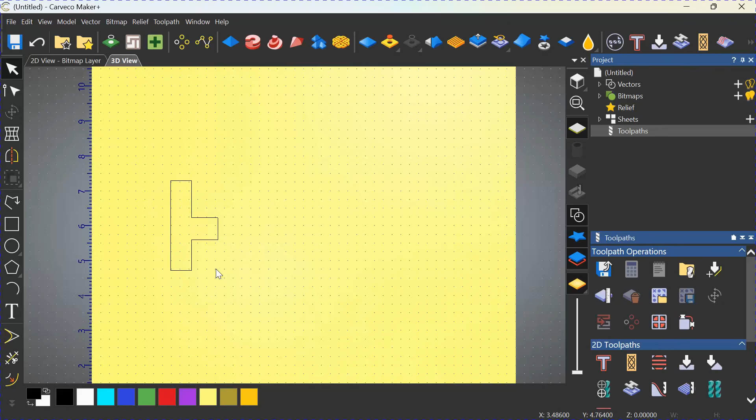Let's go into Carveco. We'll take a minute or two and I'll show you how to do this in Carveco quick. So to begin, we're going to start with the female. This is the female that we have. Now, to generate the male, you have to mirror it. You have to reverse it. So select the female, go over to the mirror tool, select that. Let's slide this back a little bit so that you can see what's happening.

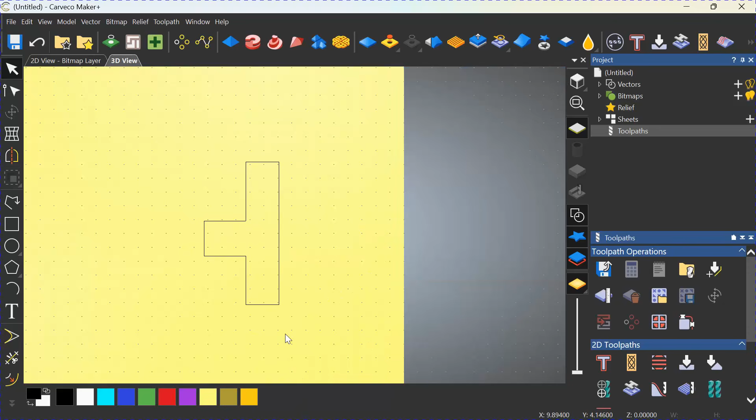We're going to go over here to across model and we're going to select that. Now, as you can see, we have an exact opposite of the female. That's the easy part. So let's zoom into this male here. Now that we have it mirrored, we have our male. Now we need to do the offset. Let's close out the mirror tool. We're going to select the male. We're going to come over here to the offset tool down here on the bottom.

All right, and we're going to offset. My sweet spot is 0.02 roughly. Again, you may want to go larger or smaller with this offset. I would do a bunch of tests before I went to my main piece. I might do 0.01, 0.02, 0.03, 0.015, 0.025 until you get the fit that you're looking for. In any case, I'm going to choose 0.02.

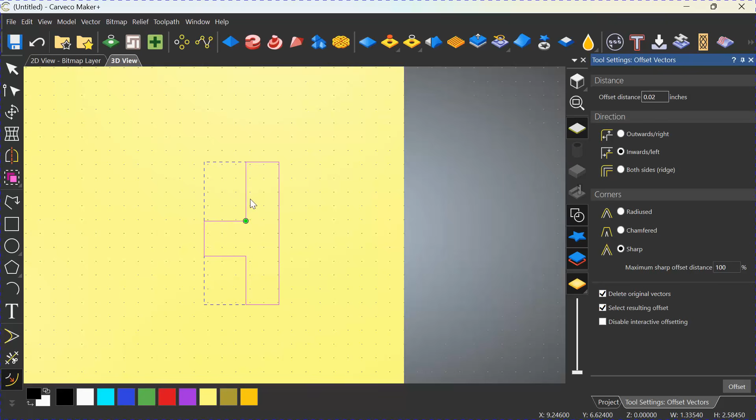We're going to inward offset left, sharp corners, and I like to delete the original vectors when I do this because it takes away the confusion. So deleting the original vectors. I'm going to zoom way in because this is such a small offset, you won't see it. So I'll click offset. Now if you pay attention to that dot right there and that line, you'll see that that distance decreases. There. So we've just offset this thing inward 0.02.

One more thing to point out. The step down on the V bit is 0.125, and I do that to keep the stress low on the bit, and it gives a cleaner cutout.

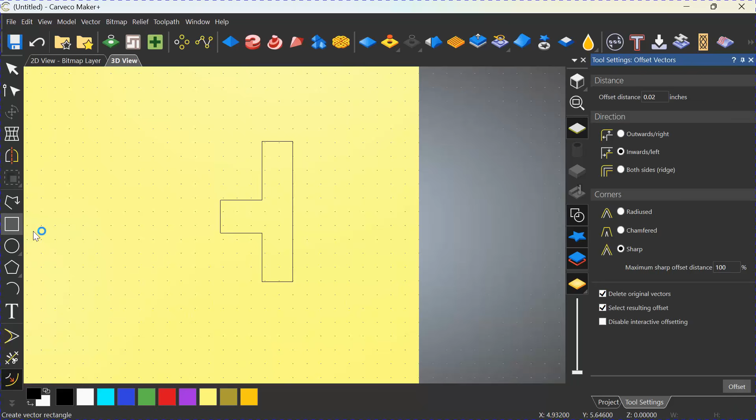So if we're going to make a toolpath for this quickly, just so you can see how we do this to generate the male as a Vee Carve, you need to put a frame around it. It doesn't matter what the shape of the frame is, but a square makes the most sense on this thing. Create the square. I like to click off of everything and then go back to it. We're going to activate the square and the backwards T by pushing Shift and click on it.

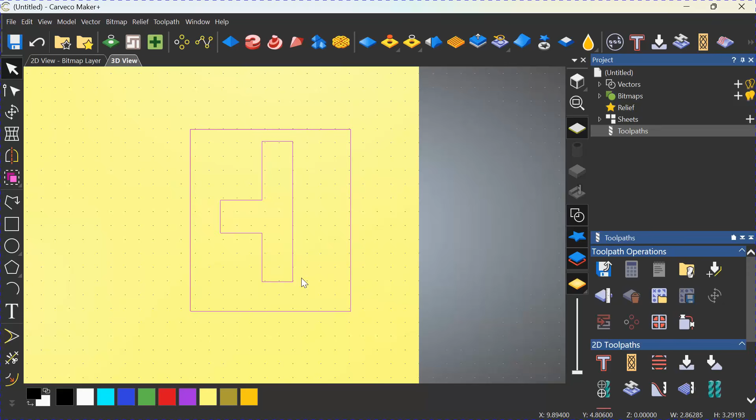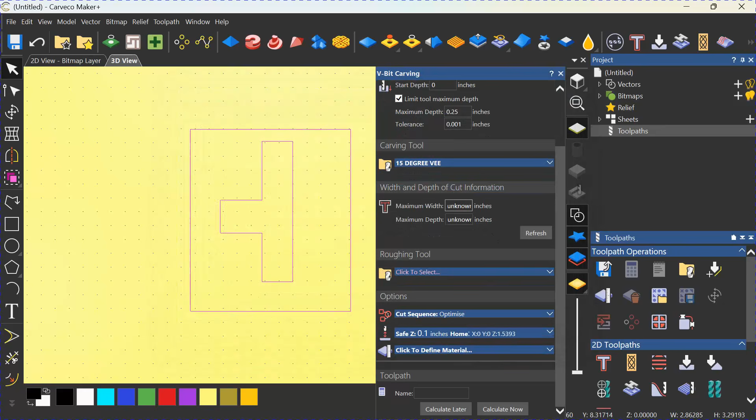Now, another way that you can do this in this simple design is to left click and drag across everything, and there you have it. Go up to Vee Carve, go down through, limit tool depth. As I said, the finish depth on the male will be exactly the same as it is on the female to avoid confusion. The carving tool is our 15-degree V right here. We'll select that. We'll continue down and we'll select an 1/8 inch end mill for a roughing tool.

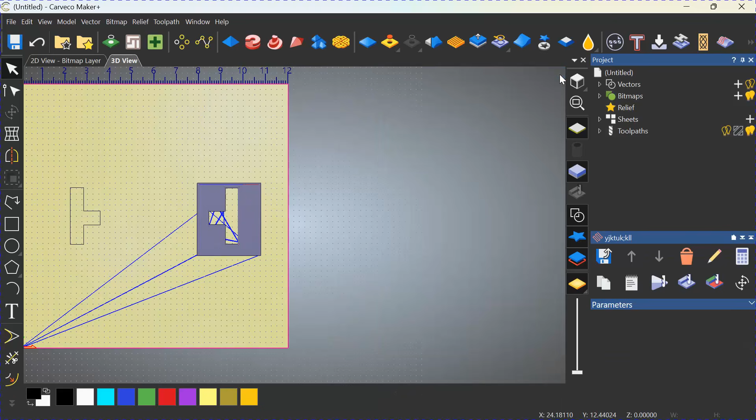Let's define the material at 0.75 just for giggles. Let's call this whatever that is, and we'll calculate now. Let's slide this over, and just for the heck of it, I will simulate this. Right click, simulate, and that way I can show you that you do indeed have a male. As you can see, once you take away this material, you have a male that is standing proud. In this programming, I can't speak for other softwares, but same process. Mirror the female, offset the male inward, generate a male Vee Carve. Let's go back out to the shop.

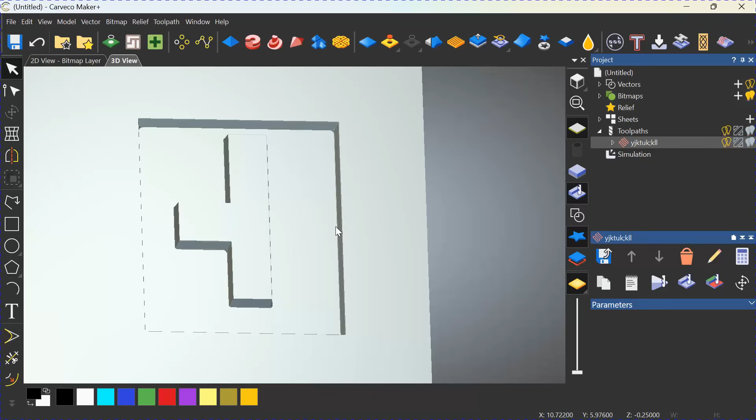Okay, so with a straight pointed bit like this one, if you can see it, this is a 15-degree V bit, obviously. This is what we programmed with. Fit is controlled by offset. It's not finish depth. It's not start depth. Offset controls the clearance. Depth controls how much material exists. It's two different jobs.

Here's the simplest way that I can actually explain this. Other than the cardboard, here's your female. If you remember this, you'll be good. Surface the board on the female. You're going to go 0.25 deep. You're going to do a Vee Carve. That's it. Female's done. Set her aside. Now the male plugs. Surface the board. Surface both boards. I said that just a second ago. If they're not dead flat, you're going to have variances in the V-bit, and things are not going to line up correctly. It's very important to surface your boards.

So you have the female vectors. Copy paste as we did in there. Mirror the male vectors. Start depth is 0. Remember, start depth is 0 on both the male and the female. We don't want to complicate this with crazy start depths that don't work anyway. Start depth is 0. Max finish depth, 0.25. Again, keep it the same as the female to avoid the confusion. It doesn't matter that this thing is chewing away 0.25 inches because the bottom stock that's remaining is junk anyway. So just cut off the 0.25 to save the confusion.